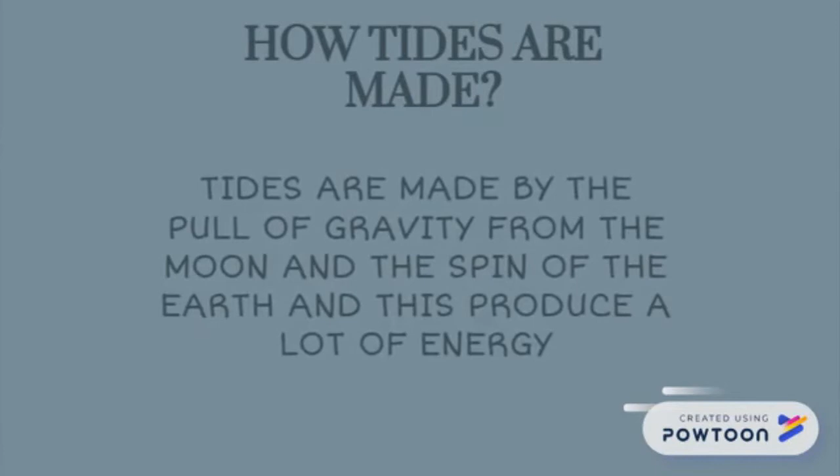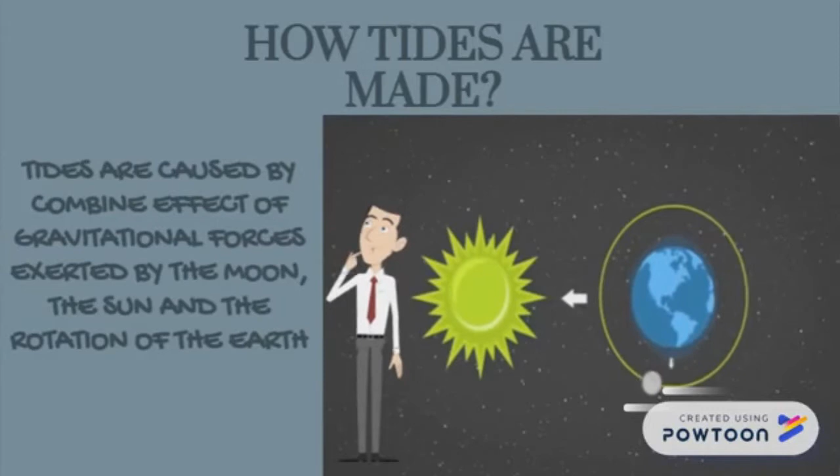How tides are made: tides are made by the pull of gravity from the Moon and the spin of the Earth, and this produces a lot of energy. Tides are caused by the combined effect of gravitational forces exerted by the Moon, the Sun, and the rotation of the Earth. Tidal technology has three main types: tidal barrage, tidal fences, and tidal turbines.

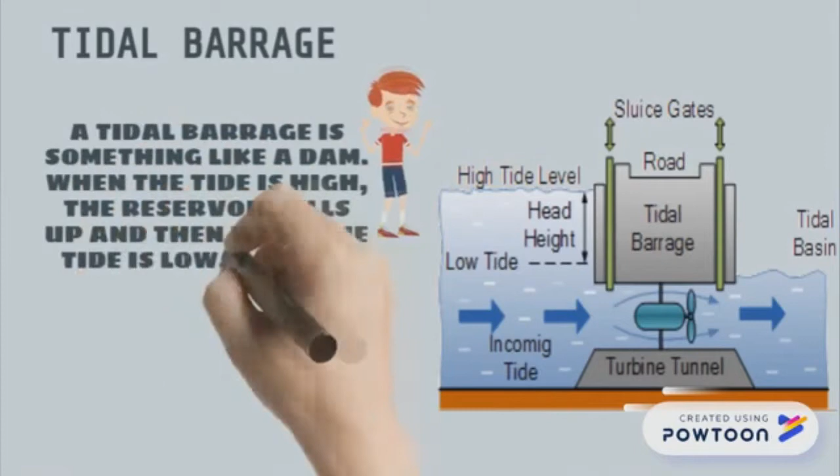Tidal barrage is something like a dam. When the tide is high, the reservoir fills up, and when the tide is low, the dam lets the water out. This moving water is so strong it has enough energy to spin turbines, which creates electricity.

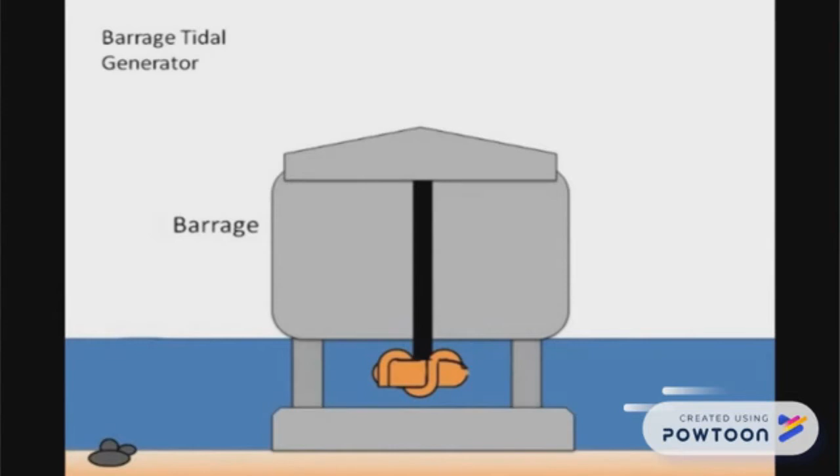Barrage power plants consist of three different parts. First, the barrage itself is made of concrete and holds the water back during high tide. The second part is the sluice gates, which let water in and out during high and low tides. The third part is a conventional turbine and generator. From these three parts, an incredible amount of power can be harnessed.

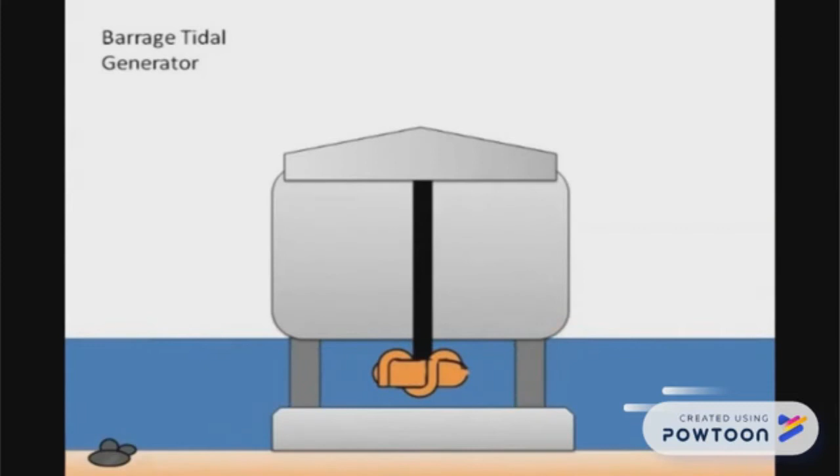The sluice gates are left open during high tide and closed during low tide to create a water level differential. This water differential then powers the turbine as the water is released. A downside to barrage power plants is that they rely on manipulation of ocean levels and therefore have the same effect on the environment as hydroelectric dams, meaning a change in the local aquatic ecosystem and high mortality for fish.

Tidal fences are smaller than barrages. They are vertical turbines that form a fence between two locations, so when the tides move in and out, the turbines begin to spin and generate electricity.

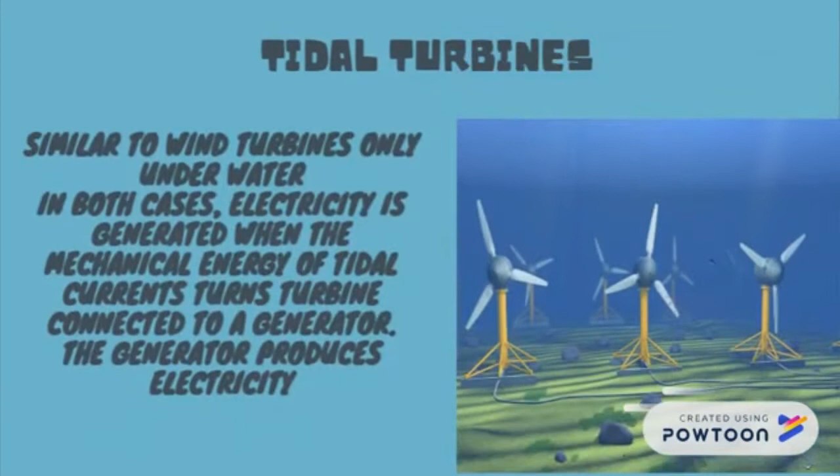Tidal turbines are similar to wind turbines, only underwater. In both cases, electricity is generated when the mechanical energy of the tidal current turns a turbine connected to a generator, and the generator produces electricity. In addition, there is also the tidal stream system, which uses kinetic energy from moving water currents to power turbines. It has a lower ecological impact compared to barrages.

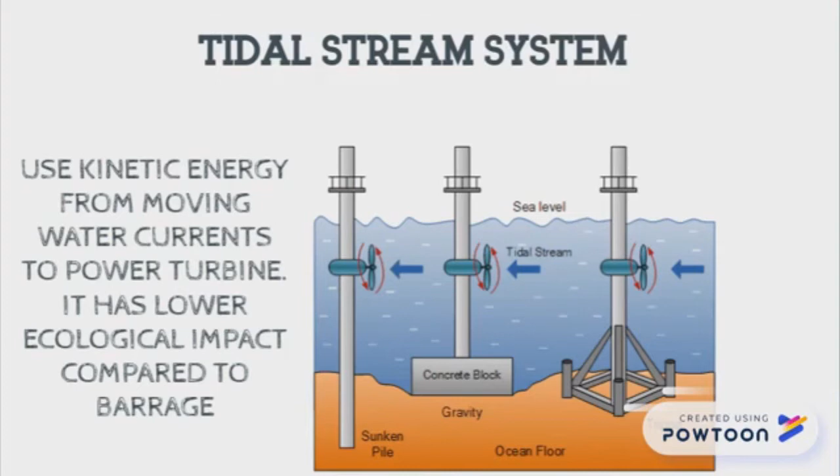Operations: tide is the periodic rise and fall of the water level of the sea, occurring due to the attraction of seawater by the Moon, producing a large amount of potential energy which is used for power generation. When the water is above mean sea level, it is called flood tide. When the water level is below the mean level, it is called ebb tide.

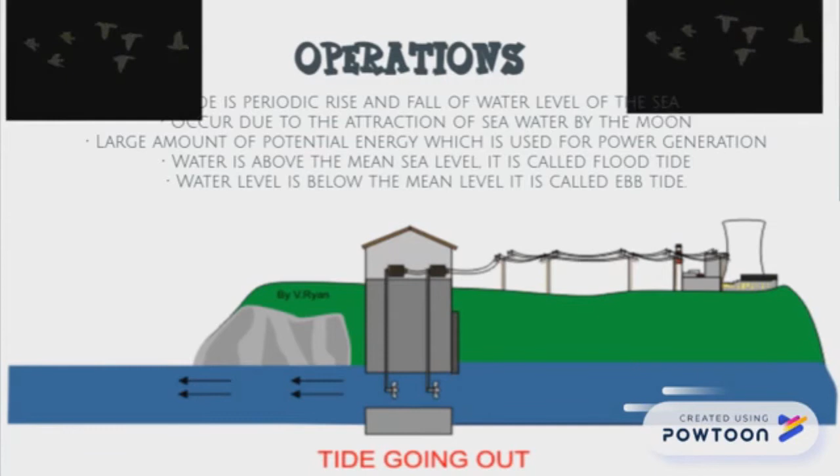During the high tide period, water flows from the sea into the tidal basin through the water turbine. The height of the tide is above that of the tidal basin, hence the turbine unit operates and generates power, as it is directly coupled to a generator.

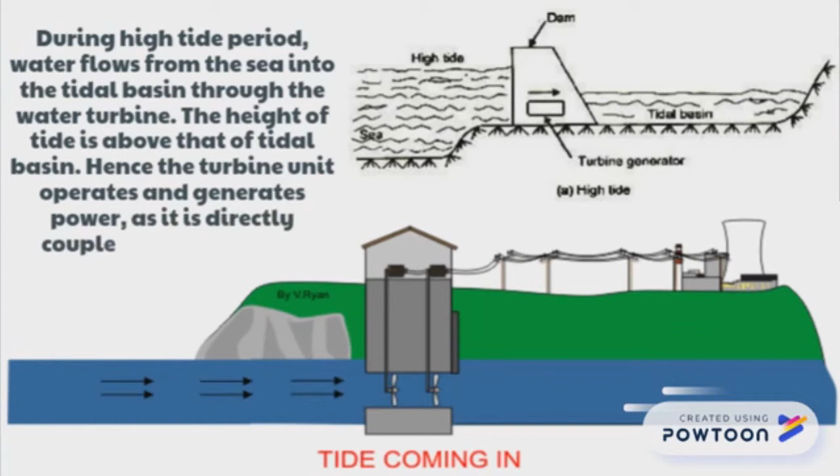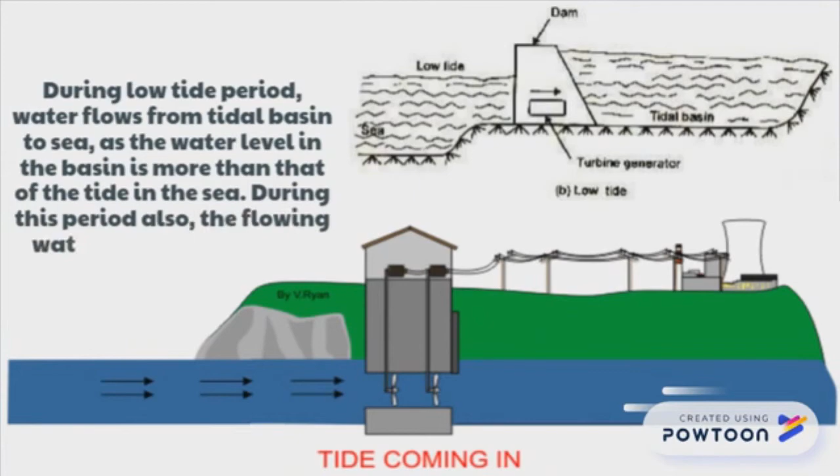During the low tide period, water flows from the tidal basin to the sea, as the water level in the basin is more than that of the tide in the sea. During this period also, the flowing water rotates the turbine and generates power.

Tidal power plants consist of three components: a dam, sluice ways from basin to sea and vice versa, and a powerhouse. The function of the dam is to form a barrier between the sea and the basin, or between one basin and another basin in case of multiple basins.

The most suitable word for tidal power plants is barrage. The function of the barrage is to increase the depth of water by some feet so that the water can be diverted into canals.

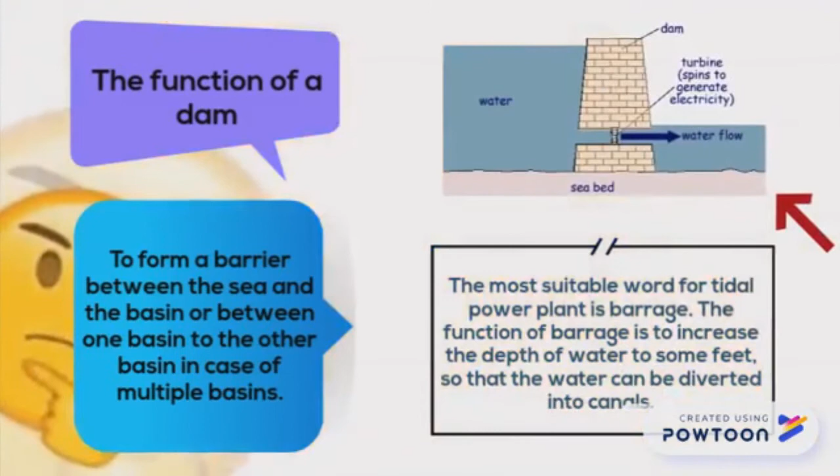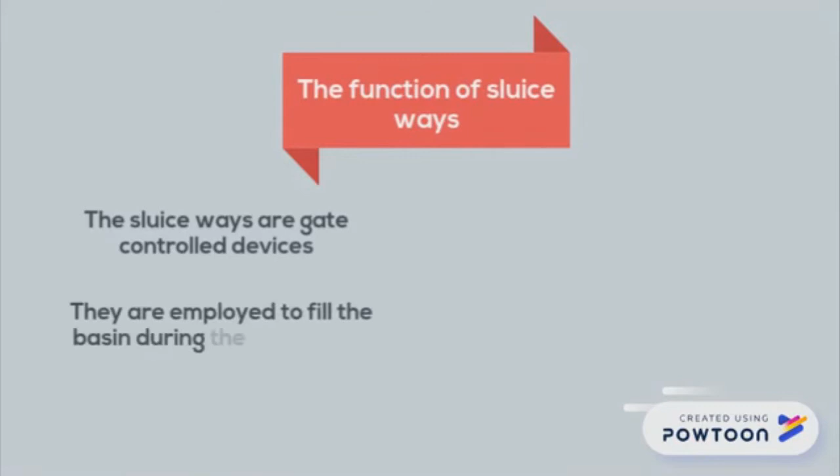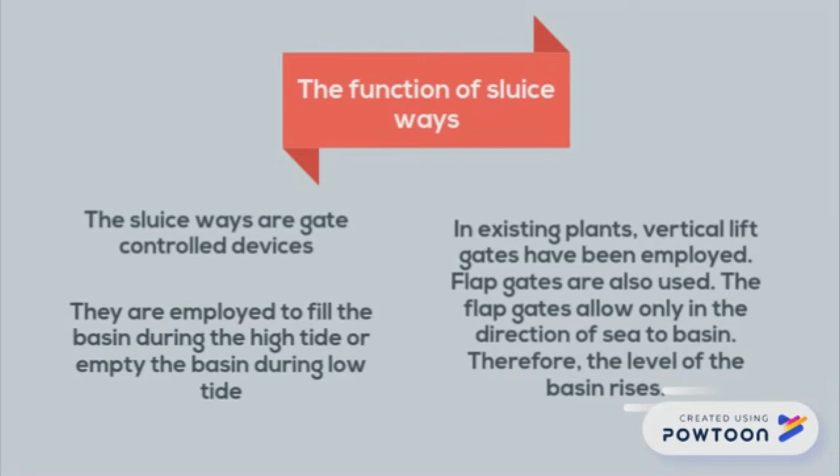The function of the sluice way: the sluice ways are gate-controlled devices. They are employed to fill the basin during high tide or empty the basin during low tide. In existing plants, vertical lift gates have been employed, and flap gates are also used. The flap gates allow flow only in the direction of sea to basin, therefore the level of the basin rises.

The powerhouse: auxiliary equipment, turbines and generators are the main components of the powerhouse. Large Kaplan turbines are used because of the low head available. Bulb types and rim types of turbines are commonly used. Shaft turbines are also understudy.

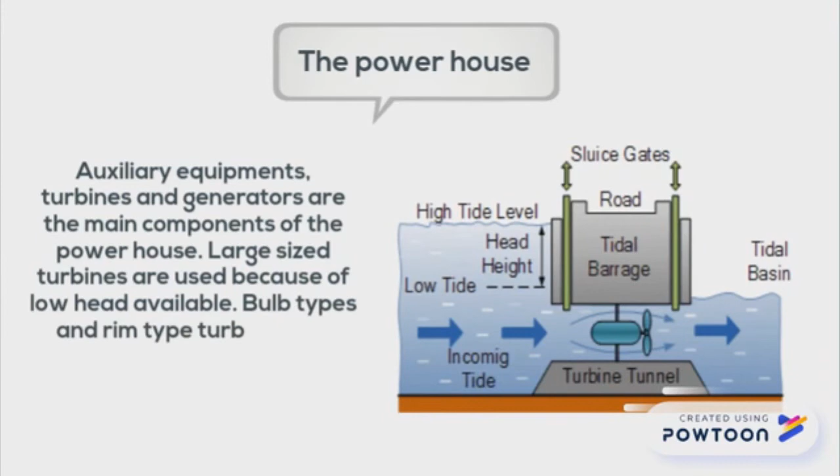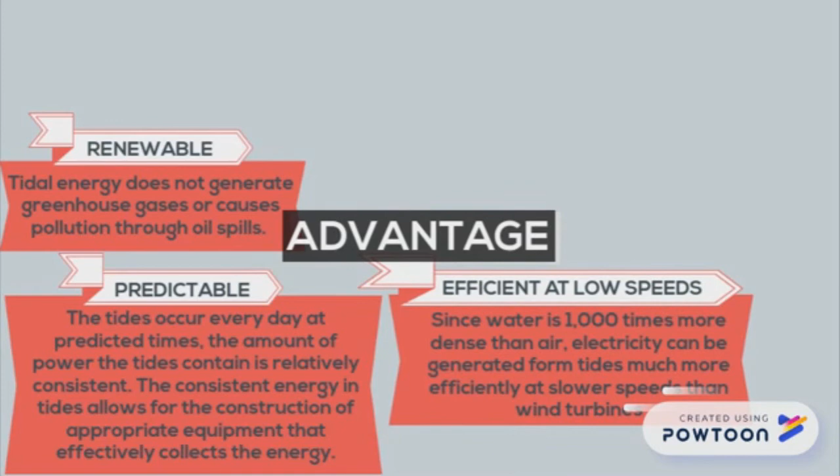Efficient at low speeds - since water is 1,000 times more dense than air, electricity can be generated from tides much more efficiently at slower speeds than wind turbines. Long lifespan of plants - the estimated lifespan of tidal energy plants is about 75 to 100 years, which is much longer than nuclear power plants. Low cost to run - they are relatively inexpensive to run and require few staff to operate them.

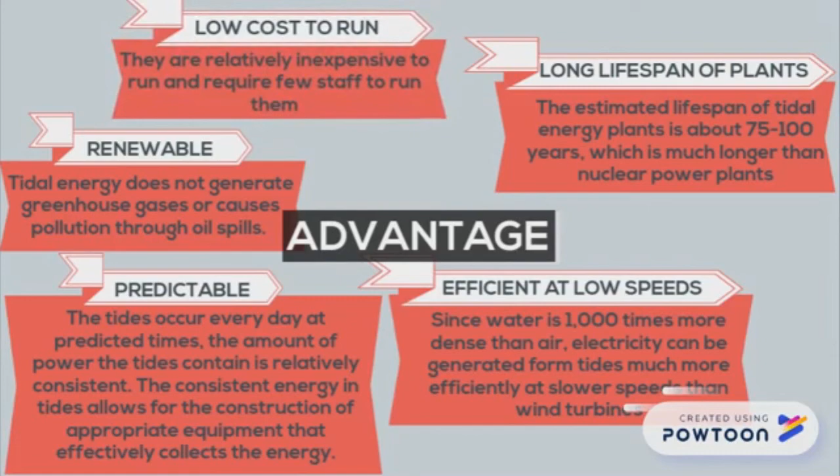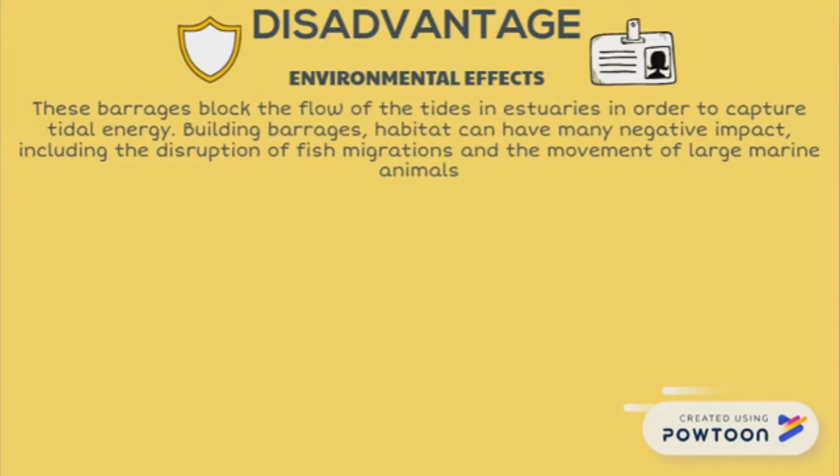Disadvantages: Environmental effects - these barrages block the flow of the tides in estuaries in order to capture tidal energy. Building barrages in habitats can have many negative impacts, including disruption of fish migrations and the movement of large marine animals. Expensive to construct - the construction of tidal energy plants requires very large initial capital investments.

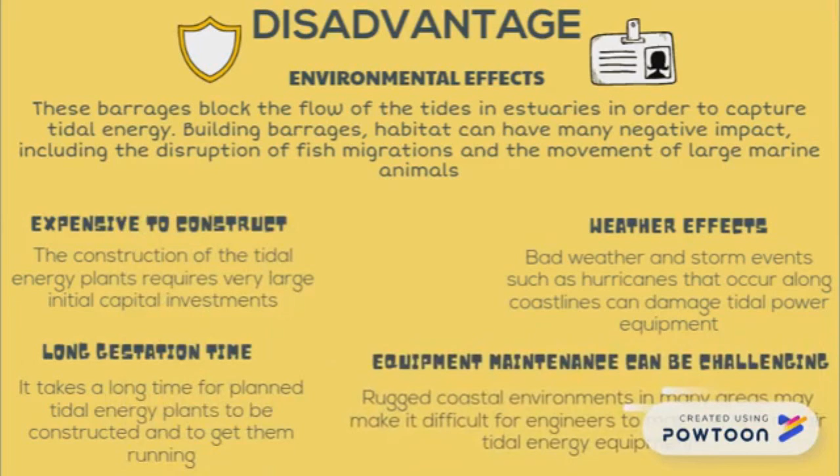It takes a long time for planned tidal energy plants to be constructed and get running. Weather effects - bad weather and storm events such as hurricanes that occur along coastlines can damage tidal power equipment. Equipment maintenance - rugged coastal environments in many areas may make it difficult for engineers to maintain and repair tidal energy equipment. Thank you for watching.